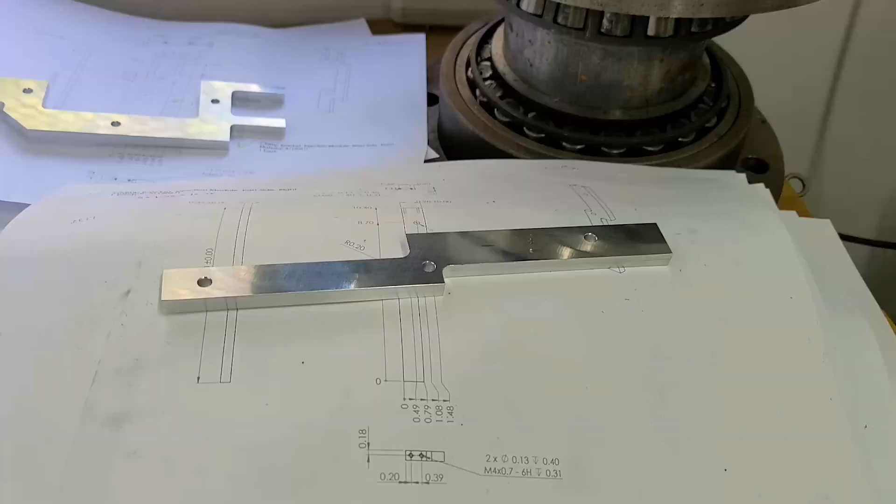And been back in the shop for a few days now, and I'll show you what we're doing. Okay, what I did was just recently today I finished all of the end work and got all these guys cut out earlier this week. So just a million brackets, and what these guys are going to do basically is bolt up and then hold these cold plates down to our instrument SPIRou.

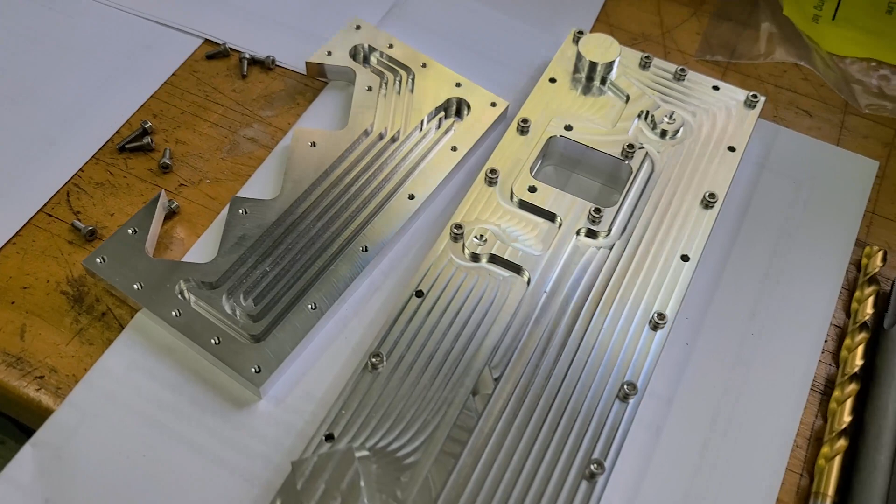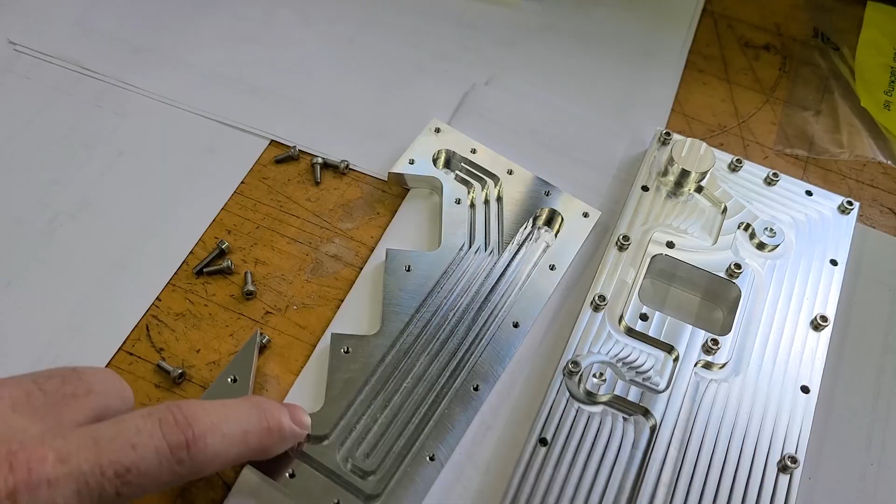Now, what we're going to do now is actually punch the entrance and exit holes in these bosses right here. So I've got this one taken apart, and we're going to start with that one. You know, oddly enough, I don't have a drawing for this. My drawing is before the revision of adding these bosses. So all I need to do is just open up the model in Mastercam, and just from that edge down to the center of the hole. That's really all I'm concerned with.

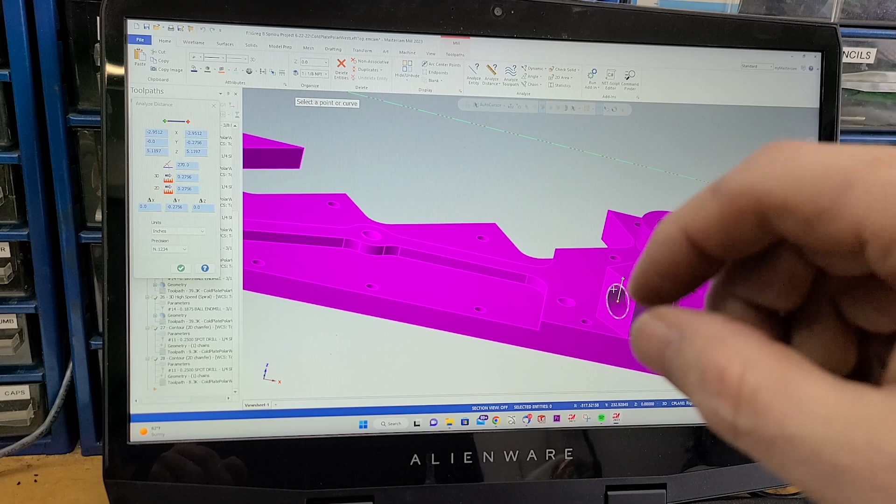And I pop that in there, and I can see it's 2756. 2756 down, and of course it's centered on the boss. So you know this is going to be a fitting. A fitting's going to go in there, and it's going to have a rubber hose on it. So the location of that is not that critical. I'm probably just going to put a little Dykem on there and scribe a line, and that will be close enough. That'll get us within 10 thou, no problem. And that's what we're going to do right there.

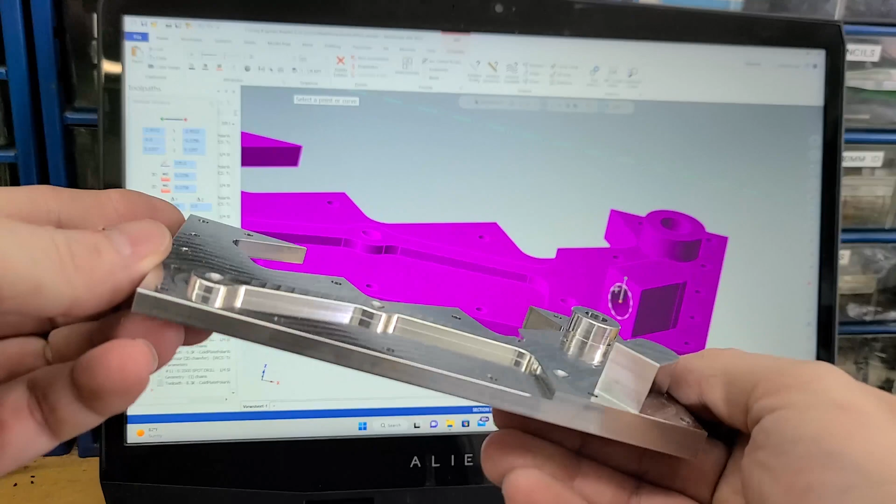This one is already, you can see right there, this one's already drilled. I did that in the CNC. This one we've got to locate and pop that guy in there. So I can show you the process on this one, and then I got to go through and do all the rest of them. And then once this is done, I think we're going to go up to the summit and actually see this finished product installed on the instrument. It'll kind of tie the whole thing together.

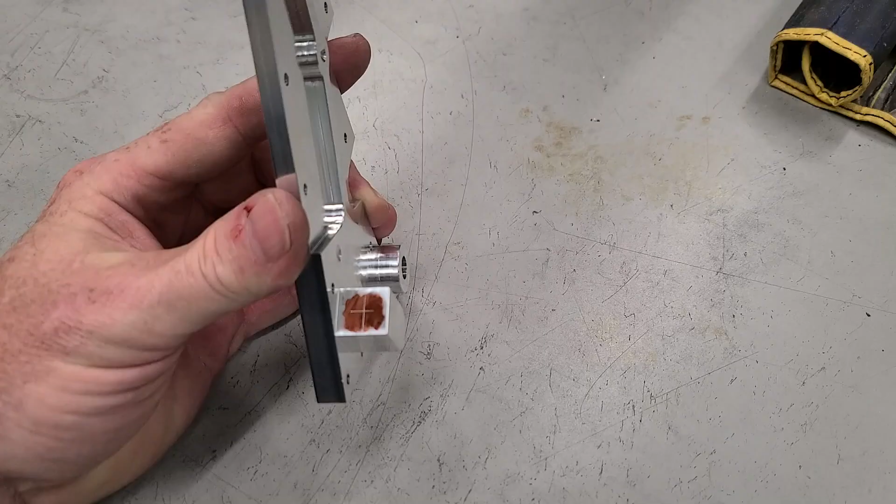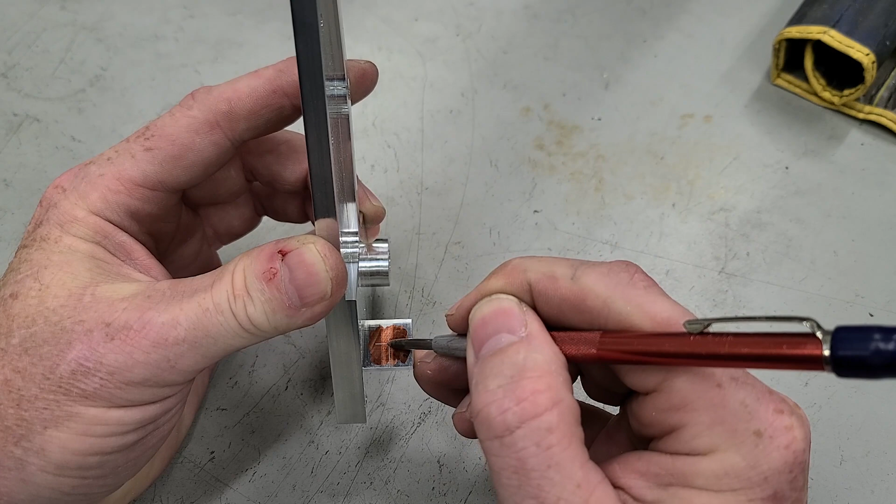Okay, I went ahead and scribed a line on that guy. I didn't use Dykem. I just grabbed a brown Sharpie, and it helps just fine. So now I'm just going to center punch on that guy. And you know, Mr. Pete got great examples of how to do this, the drag technique, where you just drag along until you feel the crossing. Rotate it up, and pow. That'll get that done right there. It'll be plenty close enough anyways.

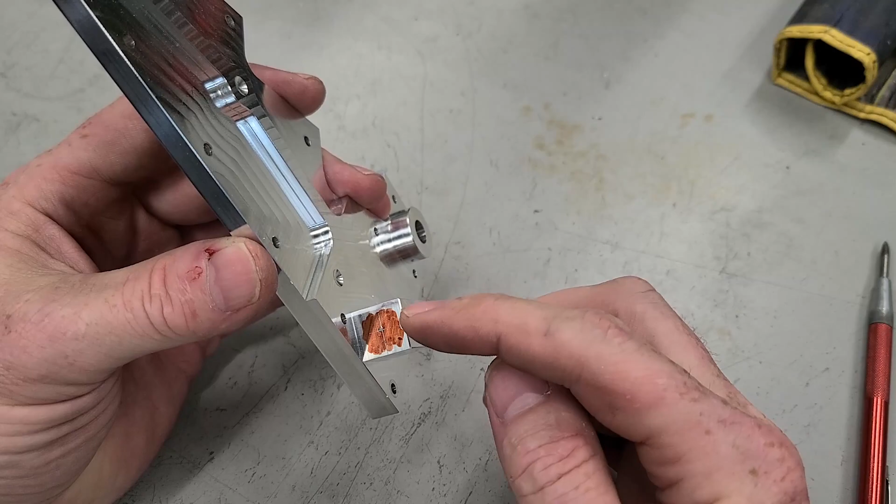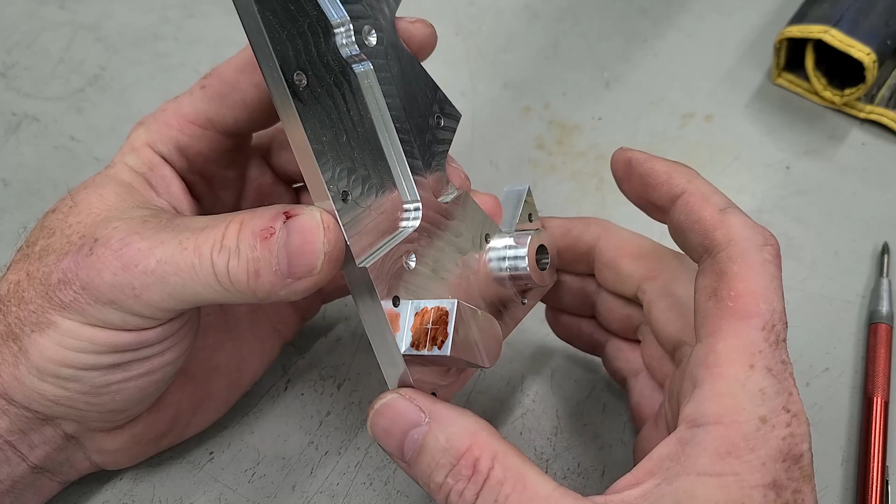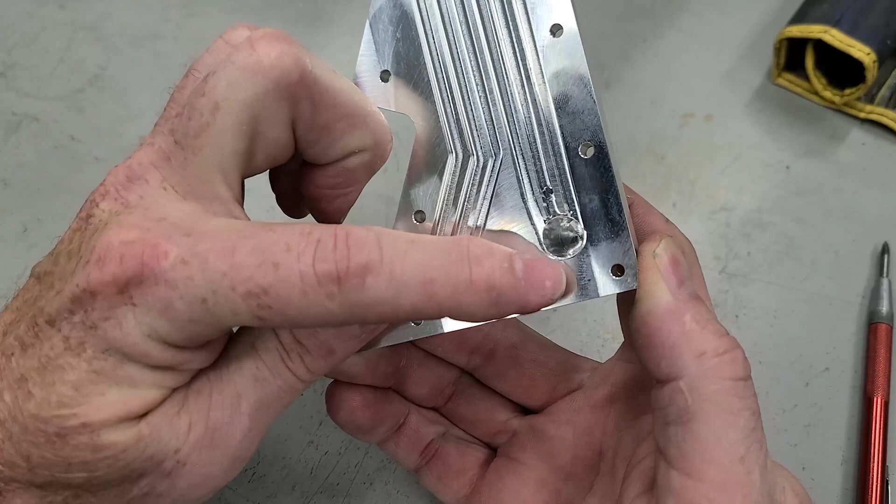Like I said, again, this is just a rubber hose coming in here. And I believe it's either a combination of series and parallel connections, or all series. I'm not sure how the engineer has spec'd it for optimum cooling. But again, it's just rubber hoses. So as long as we're close, we're going to be in good shape. We just have to meet that hole that's bored in there.

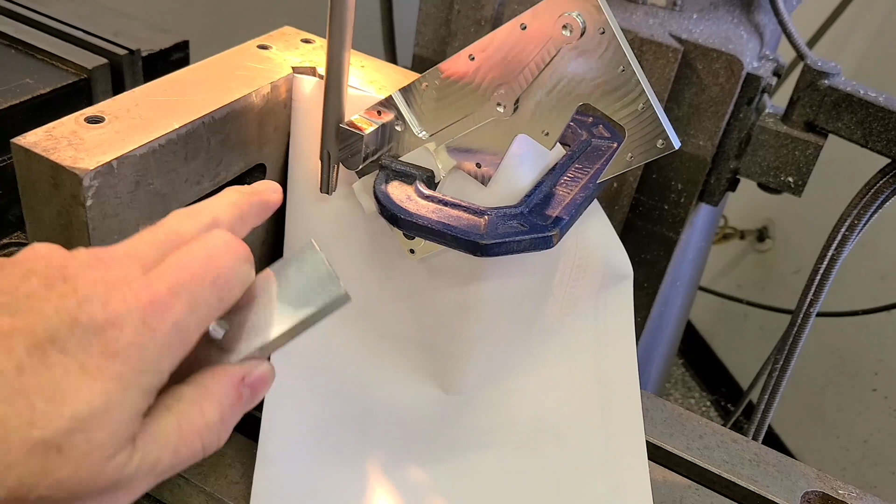Okay, when I did all the end work to these brackets, I set up this angle plate right here, and 0 and 0, and then I was able to just kind of process through these guys quickly. So I'm going to use the same fixture, and what I've got is some white electrical tape on here to protect the surface, clamping it to the back wall. I'm using the drawing to protect the part from any abrasion or anything that might affect the surface finish on this back side.

This is the tap I'm going to be using. I've got an extended reach tap. This one's not so deep in there. Some of them I have to tap all the way across the part. So I've got this 6-inch long tap. I'm going to use the edge of this tap to align to the edge to kind of square this up, and then we'll just come in with the drill, hit the punch mark, and away we go.

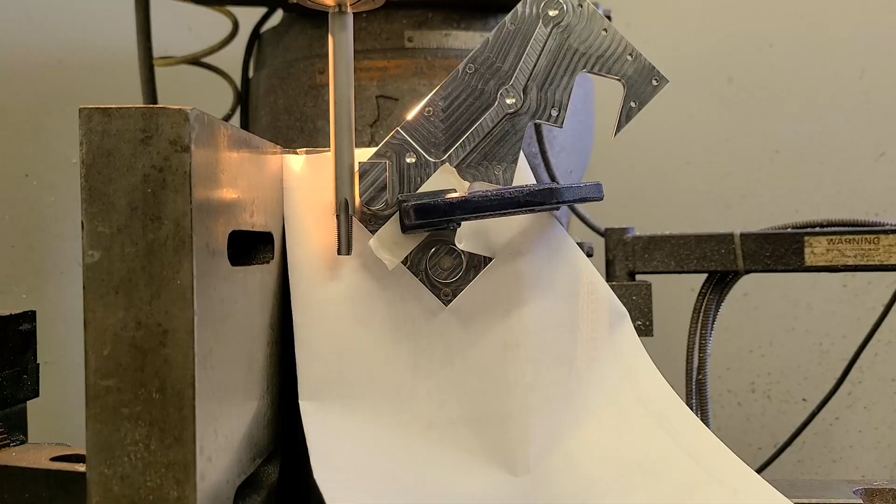Okay, now I'm trying to work around the camera for you guys, but here we go. Just loosen the part up a little bit, and we'll slide him over till he's square against that. Tighten down. The electrical tape will protect the surface. Now I'm nice and tight against that.

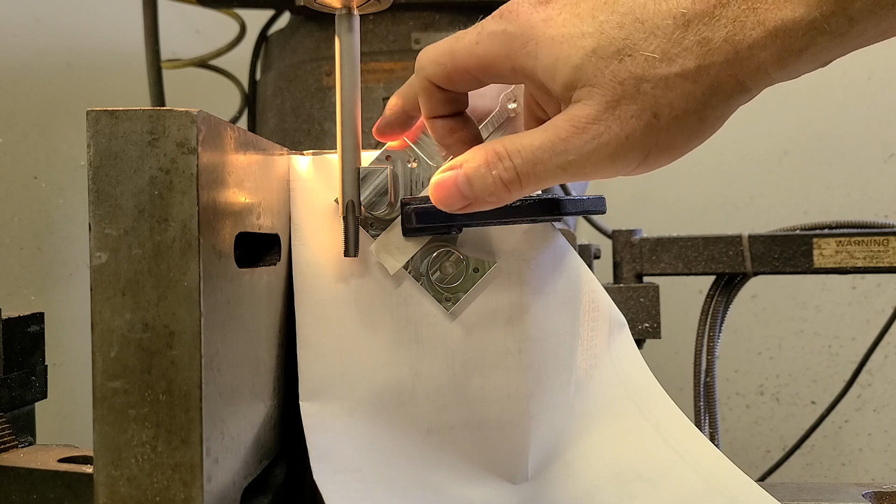So now we can put our drill in, come in, and knock this out. Okay, we've got a drill in there. So now what we're going to do is move this over and kind of find the punch mark. I could drill this with a smaller drill initially, but you know, my accuracy requirement on this is pretty low. So let's see what happens. Nice and slow speed.

Move it over just a little bit. About a tenth. Okay, that's going to be it right there. So now we're just going to go through till we hit air. I'm going nice and slow. The amount of time invested in these parts, can't afford a mistake. All right, our hole is through.

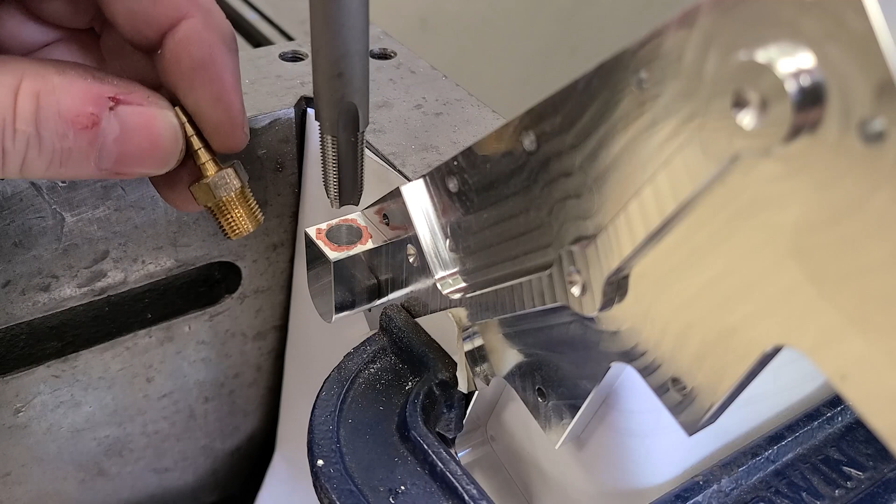Now we'll pop the tap in and see what we can do. All right. There we go. All right. Okay, now in tapping this thing, this is 1/8 NPT, so you've got to get this thing started in there, and you've got to get enough threads in there so it can seal properly.

These things are going to be glued in with a Loctite product. You know, it's just easier to make a threaded hole and buy the fittings than it is to machine this all in, so you slip a hose on, to machine the barb. We could do it, but it's just easier to do this. That's the way the engineer designed it. That's what we're going to do.

Now I've got many of these things to do. So when I do this, I make a mark on the tap, and that helps me keep track of how many rotations. I'll show you what I did there. Rotate that guy around. There's the mark. I may not get it right on this one, but down the road, after maybe 2 parts or so, I'll know exactly how many rotations to run this guy, and it'll get my depth just right.

So in the past, I seem to remember I always used to go about 9 rotations of this tap to get the proper depth. We'll probably go 6, and then we'll check, see where we're at. So let's get her oiled up and do some power tapping here. Nice and slow.

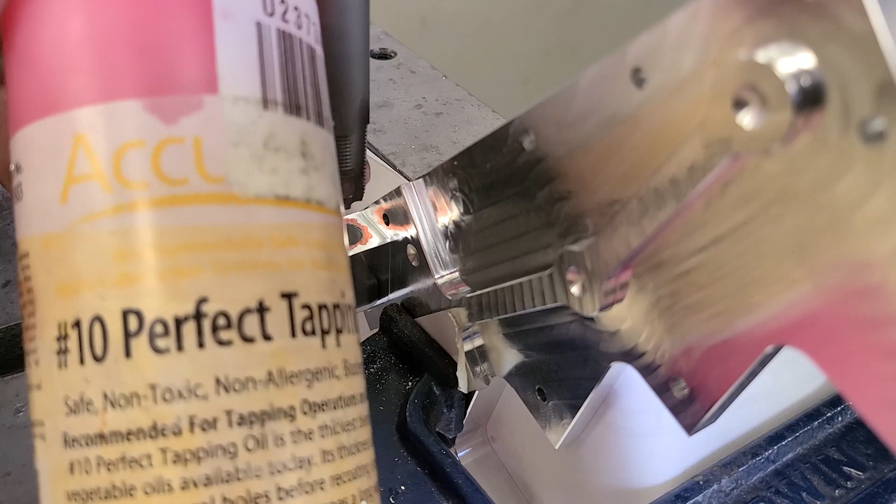I really like this product right here. I think this came from Grainger actually. It works really well on copper. And I do some thread forming on copper occasionally. You don't want to tap copper, it just doesn't work out well. 100% copper. But this stuff works really well. So that's what I use. I think I ordered a 1 bottle supply and Grainger sent me a 10 bottle supply, so I just keep using it. Alright.

So I got a little on the tap. I'm gonna go ahead and sink a little in the hole as well. You just can't have enough oil on this thing. And I get her close, and what I'm gonna do is just kind of plunge in and start counting. I think we'll go six turns. Okay. Maybe we'll go 5. Let's do 5 and we'll check. Okay, so there. Go. 1, 2, 3, 4, 5. Made it 6 1/4.

Now we're coming out. I'm sure that's going to be shallow. And you just get about a thread started on that guy. So like I said, 9 turns is going to be about right. So what I'm going to do is just run her in for 3 more turns-ish. We should be able to see based on the chips. When the chips start forming, I'm going to want to go about 2.5 more turns.

You can see the back side of this part's full of those channels, and it's a delicate sealing surface. So this thing's going to get bolted together and basically glued together with a Loctite product that's a gasket former, basically. So that's why we had to use the paper to take care of that surface. I used a little piece of tape right here. I like electrical tape. It's pretty durable and peels off cleanly to protect this surface.

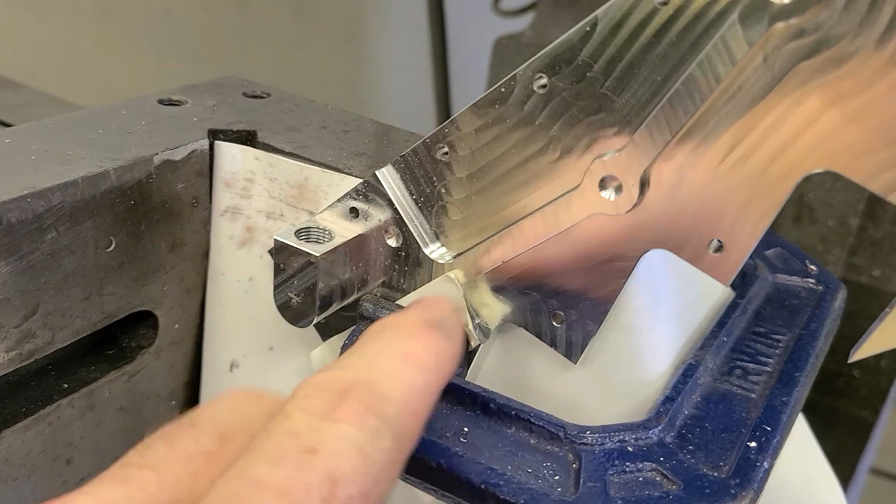Of course, this is just aesthetic. Only thing that touches is right here, and these are going to be little spring-loaded hold downs to push this thing against the instrument. There will be a thermal paste on the back side that will complete the thermal bond between this thing and the instrument. And of course, through these holes, we're pumping glycol, or coolant rather, I should say.

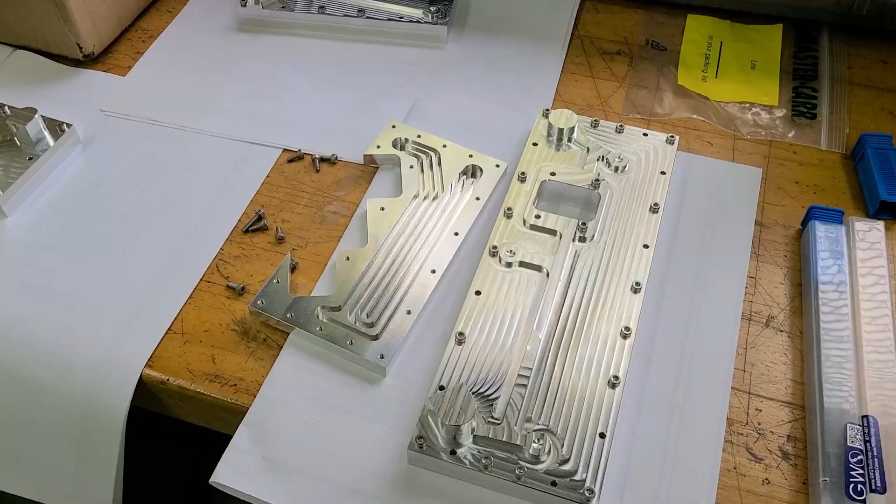Now we just got to do this one. We can do this one in the vise, and this part's done, ready to install. Now we've got a few more to do. Here's the back side of the one we just did. Now we got to do this one in there, and then straight down in that one. This one's going to be pretty ugly all the way up there. That's why we bought that long tap.

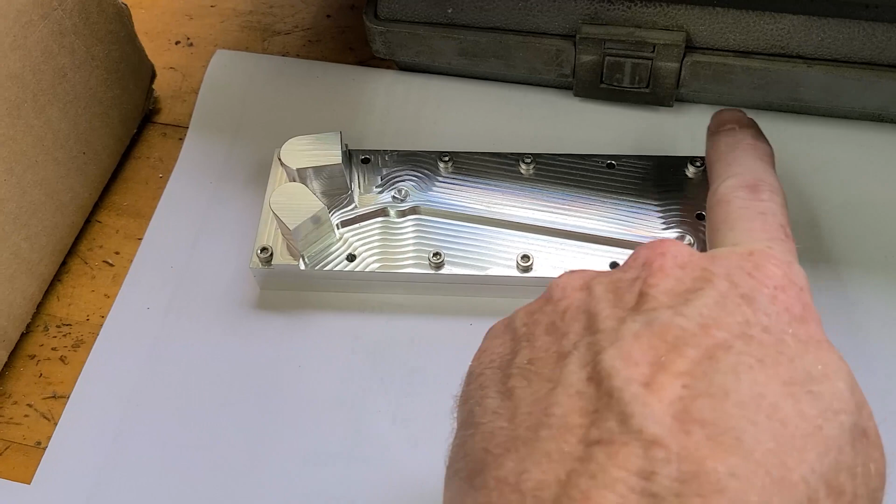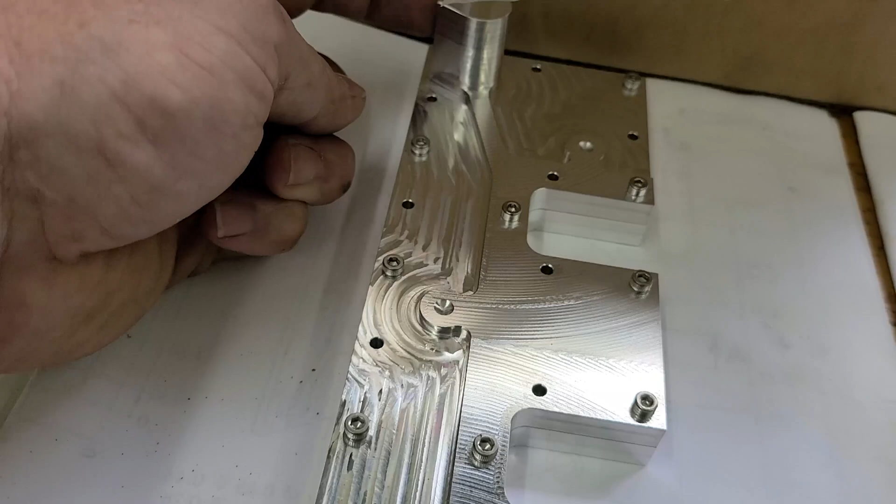This one's just across. This one shoots out right there and straight up here, straight down and right there, straight out the back and across the whole part. So there we go.